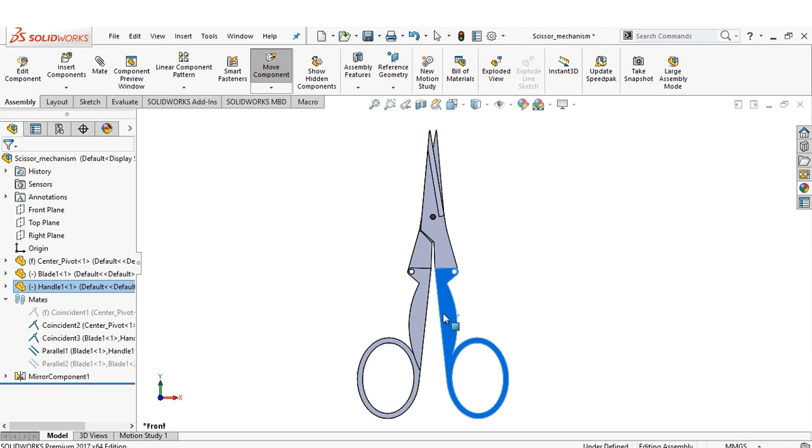Hi everyone, in this video we will see a simple mechanism of foldable scissor. The main parts are cutting blade and handle. The cutting action as well as folding of handle is achieved using some pivots.

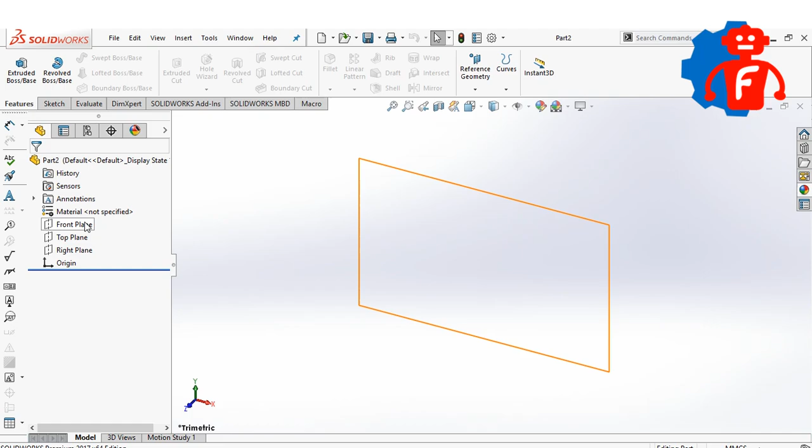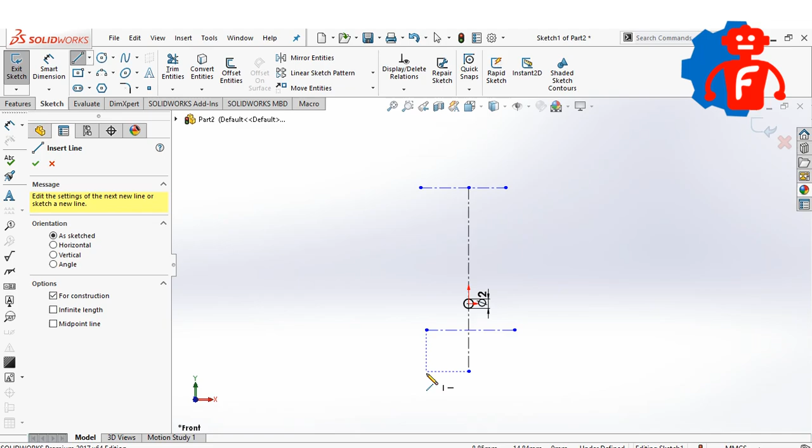Let's start. Open a new part file. Create a sketch on front plane, draw a circle at the center as shown. Draw some construction lines for reference, to define the height of cutting blade and pivots. Defining the length of each reference from center pivot, follow the dimensions as shown.

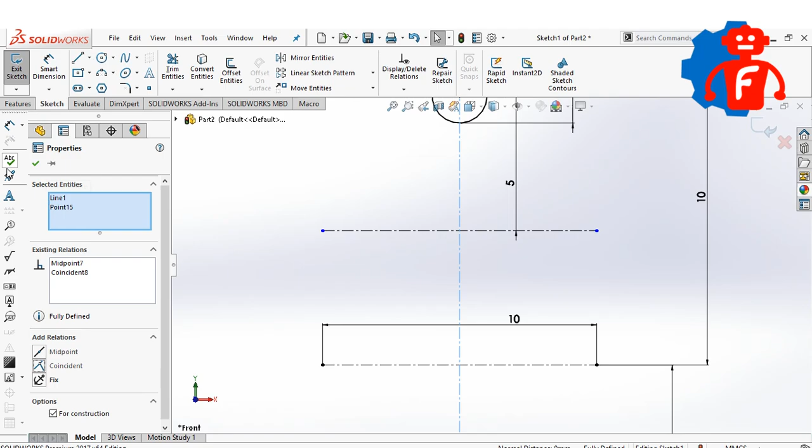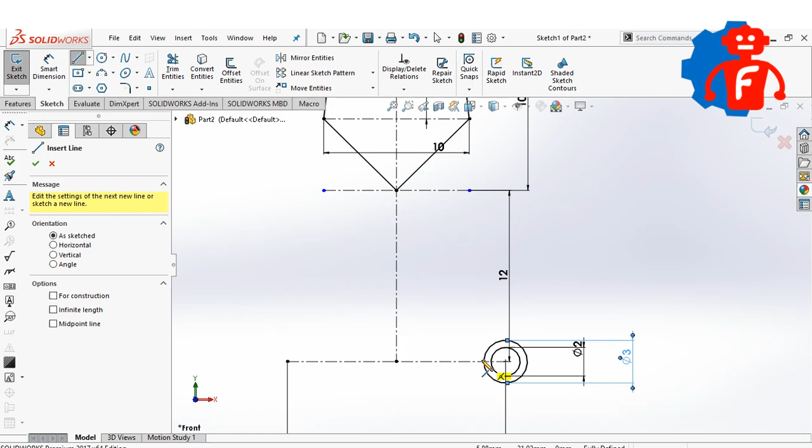Create the main edges of the blade as shown. Now, creating the pivot for the handle part of scissor. Overall the height of blade is 65 mm.

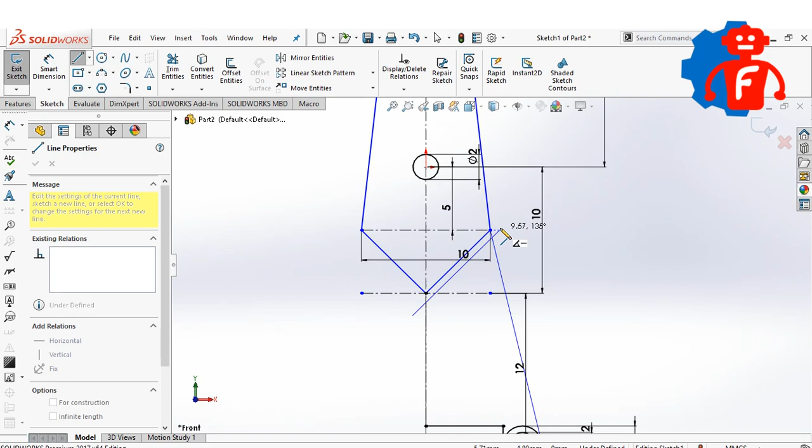Now, create an offset line as shown. This below part of the blade will have more thickness. The base sketch is done, let's save the blade.

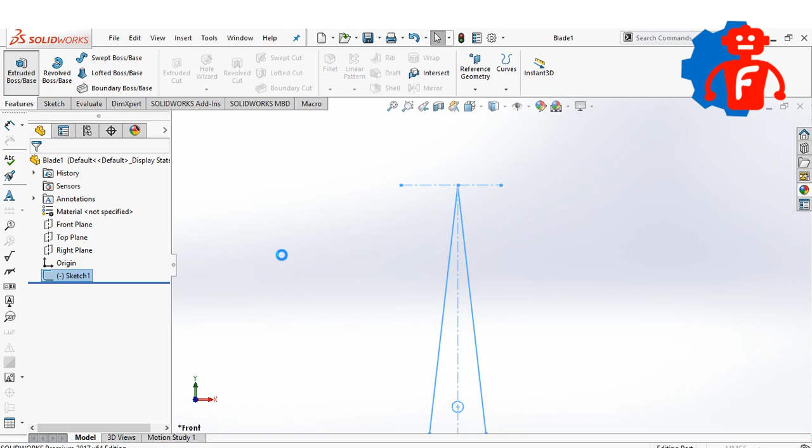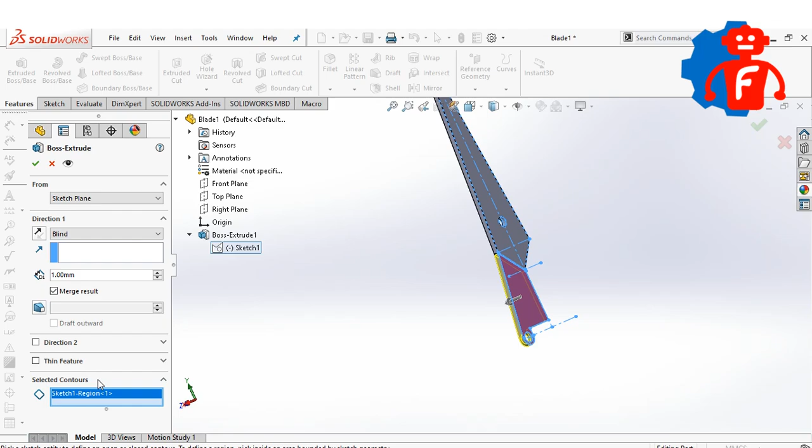Extrude the selected contours of the sketch as shown for 1 mm. Now extruding the bottom part of blade by 1 mm on other side. Filleting the edges as shown.

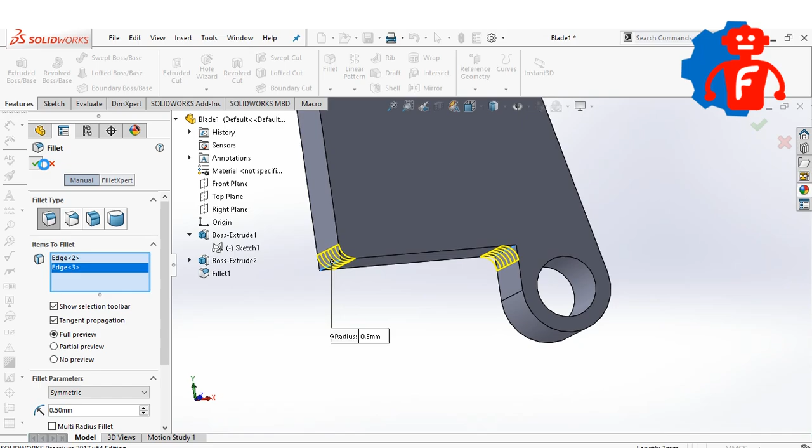Now, we will create the sharpened edge of blade. Create a plane, with the edge of blade as a reference. Select the topmost point as second reference. Create a new sketch on this plane.

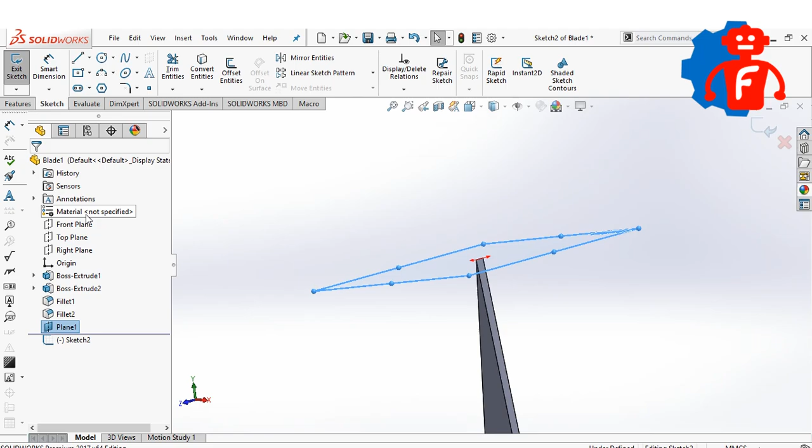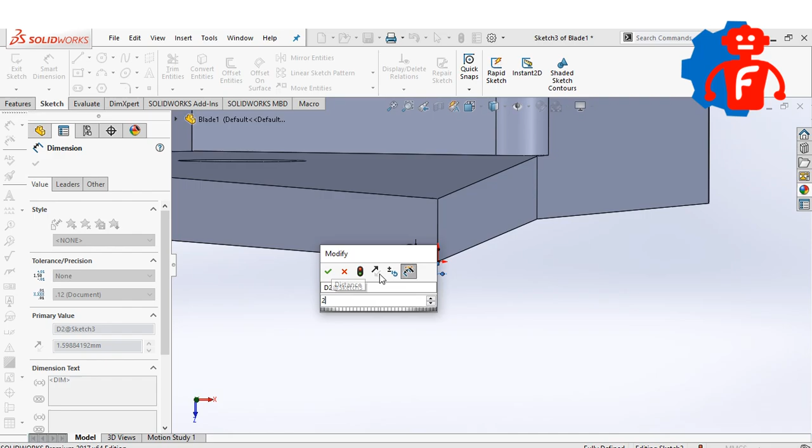Drawing a triangle which we will cut extrude from the part. Simply extrude the sketch. It will cut along the blade edge, as it is the normal direction of the created plane.

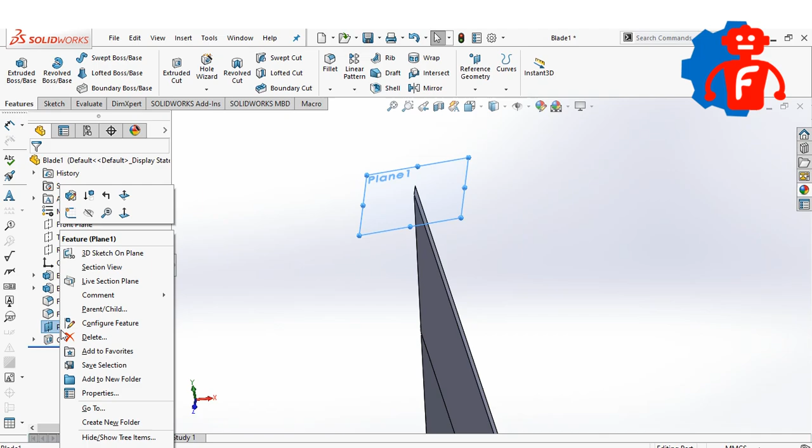Lastly, filleting the top edge. The blade component is now completed.

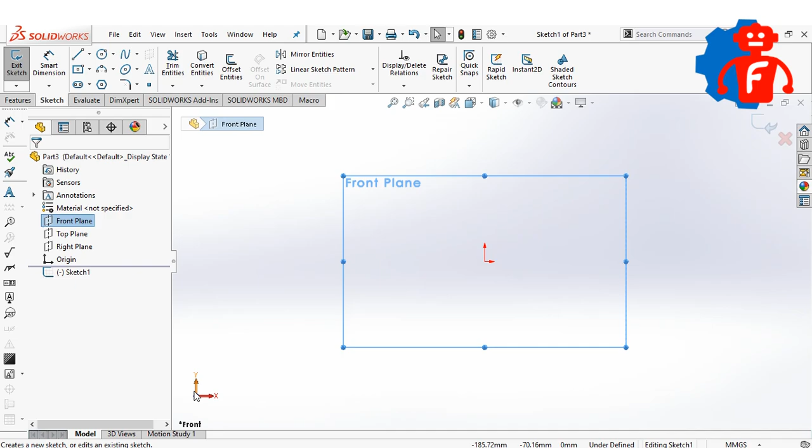Again, open a new part to create the handle. Create a sketch on front plane. We will start by creating the reference for the pivot for blade. Make sure to follow the dimensions closely.

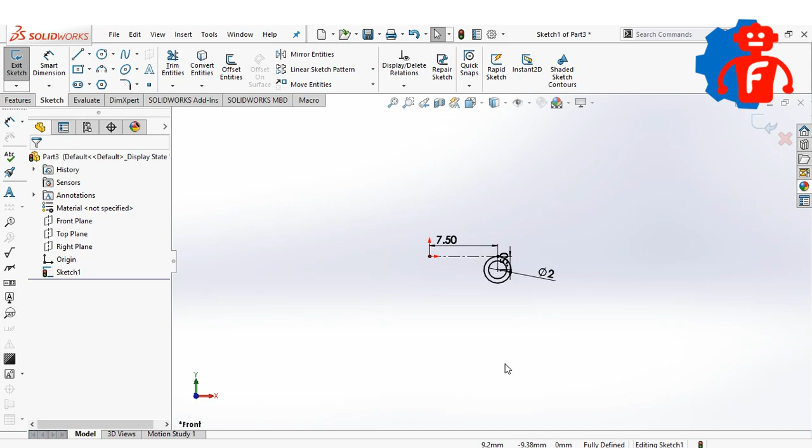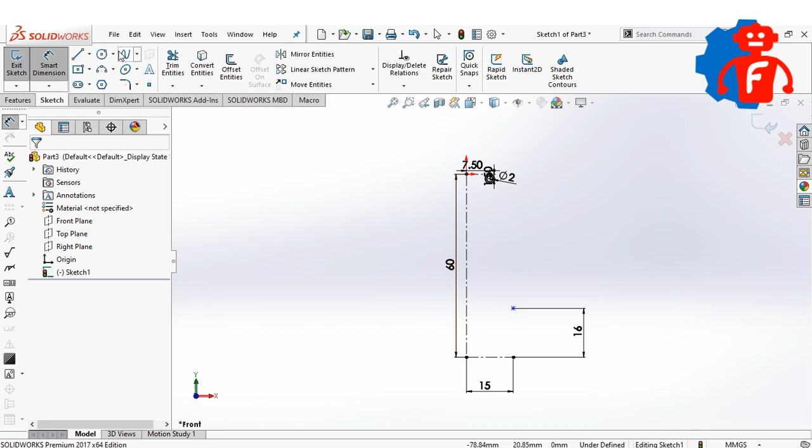Creating reference lines to locate the center of handle. Creating ellipse for the handle shape as shown.

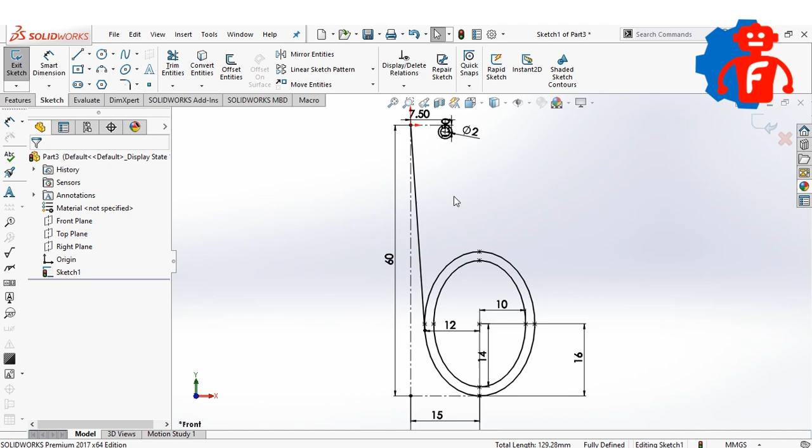The top center part of the handle is a free shape spline. Again here, we will create some curves as we will have different sketch contours for different extrusions.

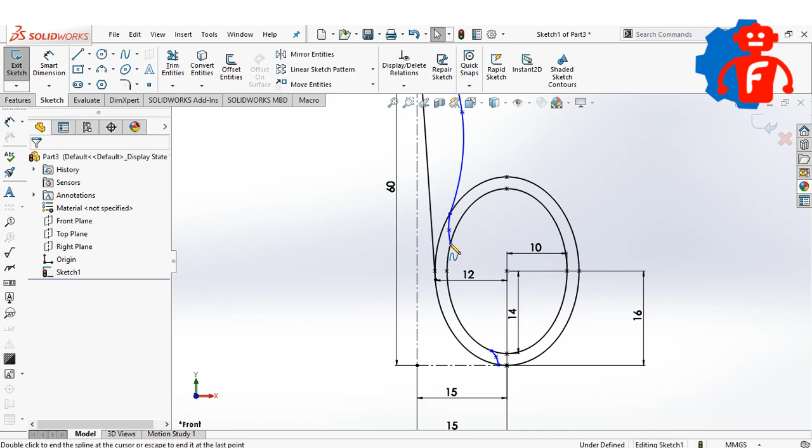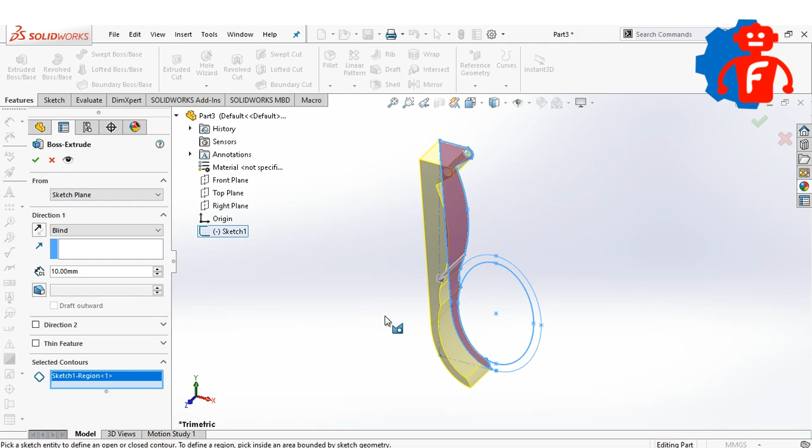Extruding the first contour as shown, we will later shell it as its corresponding handle has to fit in it while folding. Saving the part as handle.

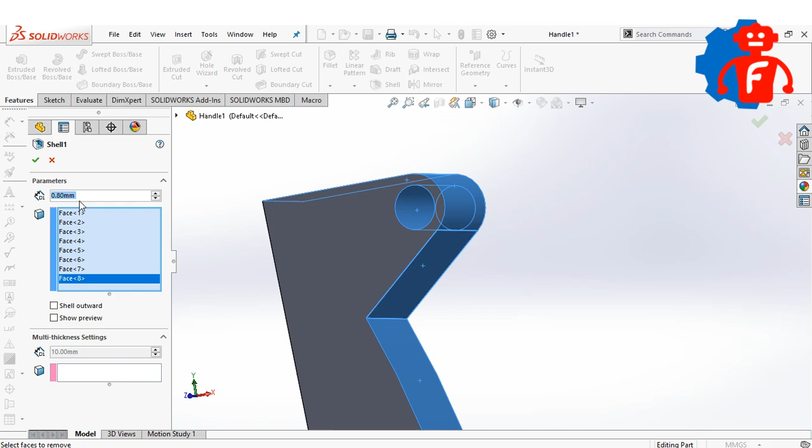Use shell feature. Now, extruding the remaining part of handle on one side.

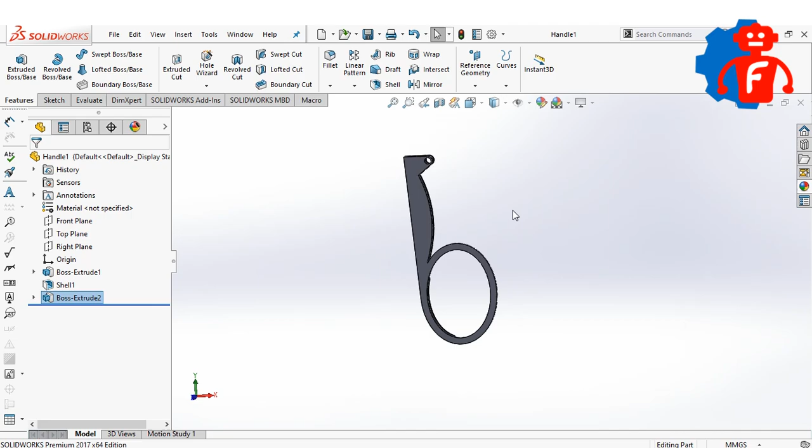I did one mistake. While the handle will close, it will interfere with its counterpart, modifying the sketch and consequently the first extrude as shown.

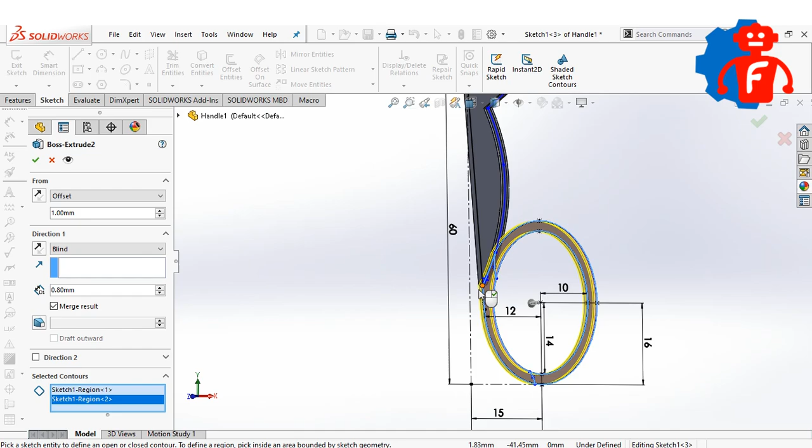Now the handle is good to go. Lastly, we will create a center pivot, along which the cutting action of scissor will be possible.

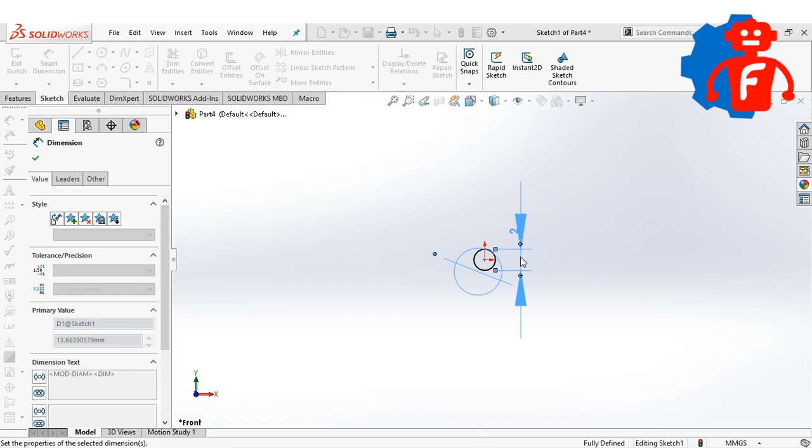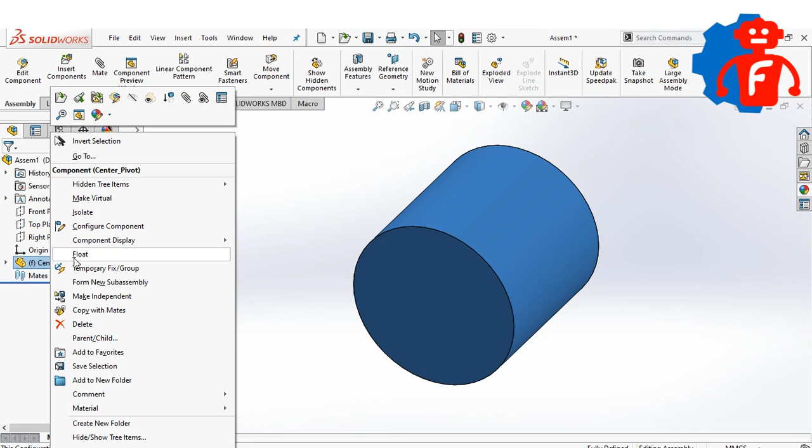Save the part. Open a new assembly document. Insert the central pivot. We will mate the origin of central pivot with the origin of assembly to bring it at the center.

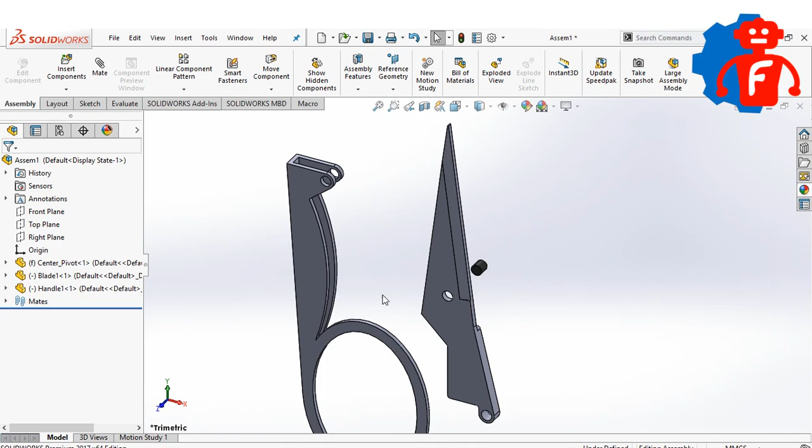Now importing the blade and the handle. Simply mating the center pivot with the slot in blade. And then the handle to the blade as shown.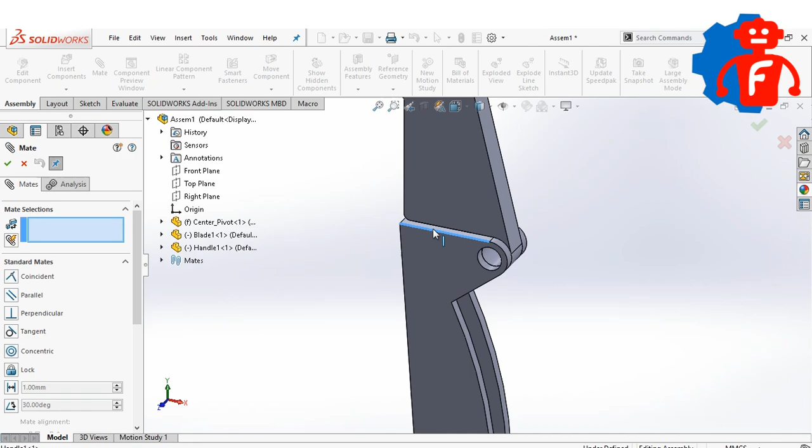We will add a temporary mate, which will be enabled while visualizing the cutting action. Let's save it.

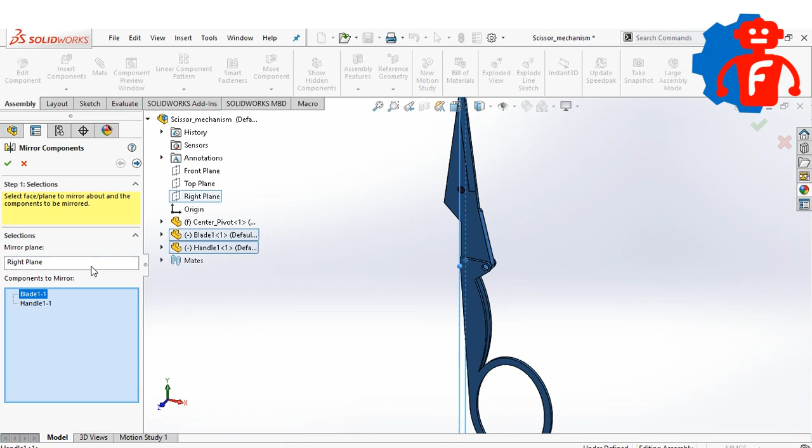Lastly, mirror the blade and handle along the right plane of assembly. Make sure Create Opposite Hand version is not checked.

The scissor is ready and we can play with the mechanism.